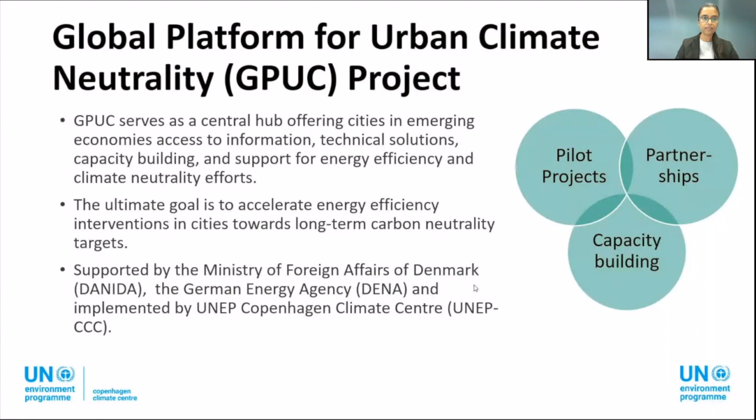Over the past 2 days, we've covered a lot of ground on the critical role of energy efficiency and how it plays in the building sector. On day 1, we looked at why energy efficiency matters, especially when it comes to reaching our climate goals. We heard from government representatives from Mauritius and Zambia who shared in-depth perspective on the unique challenges their countries are facing and the ambitious targets that they've set and what support is still needed to get there.

We also touched upon a variety of strategies, both active and passive measures, and got an introduction of the EDGE tool, which is helping unlock green finance for buildings across Africa and beyond. IFC's implementation projects gave us some real-world context to the tool, and the panel discussion highlighted the challenges surrounding the financial gaps and limited awareness, which were echoed by both Zambia and Mauritius.

Then yesterday, we focused on policy and regulatory frameworks, what they look like, how they're applied, and how they can work in different contexts. We explored tools like regulation, incentives, and information instruments, and learned from the experiences of Zambia, Mauritius, and Ghana. We talked about how nature-based solutions and energy efficiency can go hand in hand to deliver sustainable, long-term outcomes and the opportunities for multi-stakeholder collaboration in the building sector. The conversations have been rich, the questions insightful, and your engagement truly inspiring.

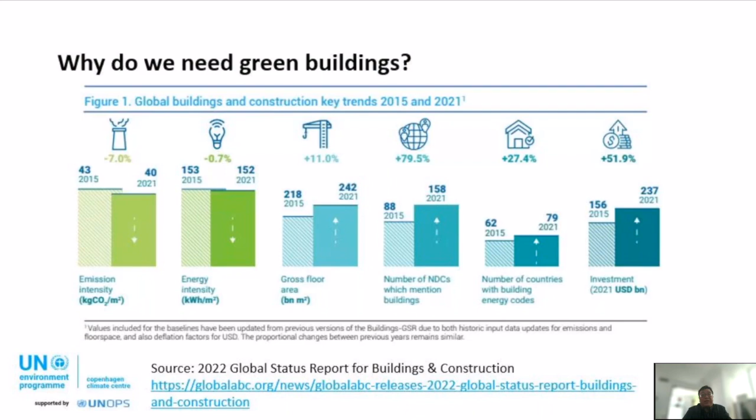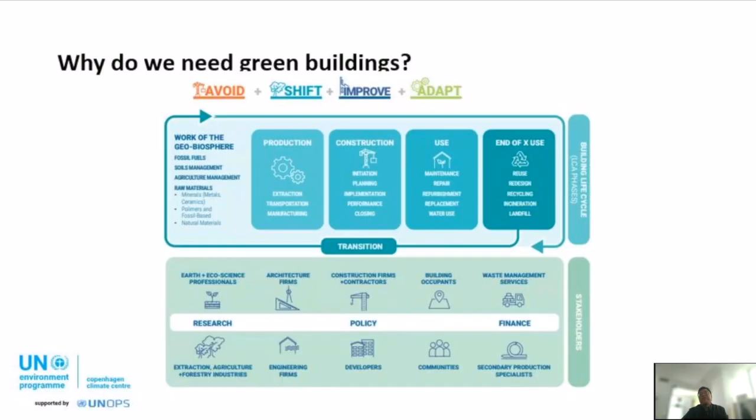So as a result, the report suggests several steps that we need to improve CO2 emissions in the building sector in order to transition to a future of zero carbon buildings. It requires the design of multi-beneficial material strategies that take a whole building life cycle and a systematic thinking approach. That is very much in line with today's topic in my presentation about integrated building performance design. It requires systematic thinking, covering not only the standalone building itself, but also the community and the city scale. And not only the architecture design itself, but also the mechanical design, the water efficiency, and the energy efficiency.

As you may already know, there are a lot of benefits from green building implementation, and a lot of co-benefits as well. As you can see in the middle, that is research from the US Green Building Council, mainly in the USA, saying that by implementing LEED certified buildings and operating them in a LEED certified way, you can save around 30% energy on average, and more importantly, 35% of carbon, 30 to 50% of water, and generate 50% or even 90% less waste. So this gives you some of the benefits and co-benefits that green building can bring.

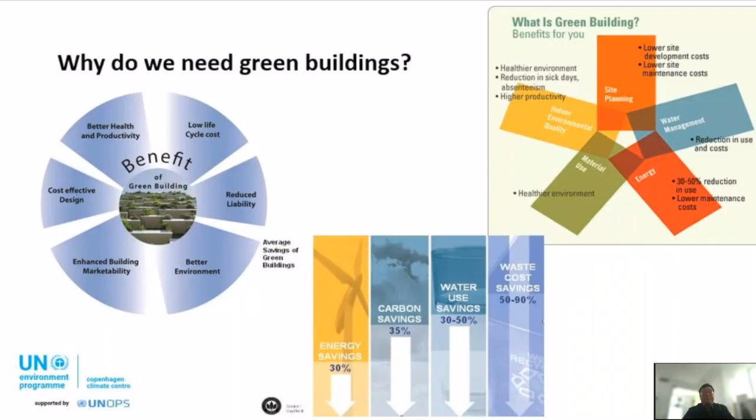And then let's talk about energy efficiency and how it links with green building. As you know, energy efficiency and water efficiency are key parts of green building certification. Like I mentioned, improving energy efficiency in buildings can bring benefits not only at the building scale, but also at the district scale, meaning that if all the buildings in a community are designed based on green building, they can have regional benefits.

And then also, even at the city level, it can bring additional benefits at the city scale. It can be more environmentally friendly, conserve natural resources like water and energy, generate less waste and pollution, and more importantly, save costs through using less water and energy. And more importantly, it can improve the indoor environment, making it safer and more comfortable, so that it can improve the health conditions for the occupants.

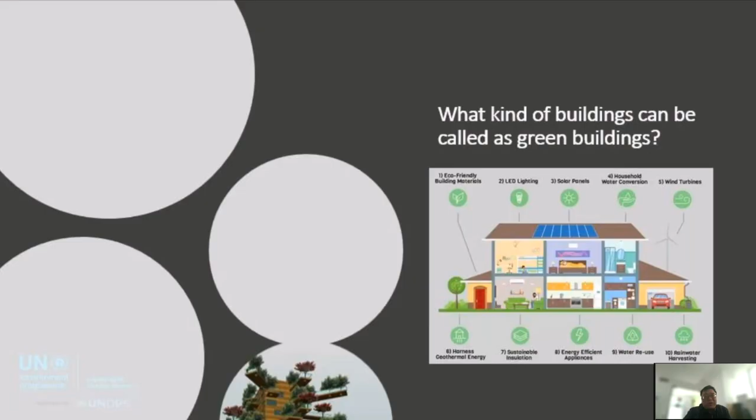So then we come back to the basic question: what kind of buildings can be called green buildings? Actually, this is not a simple question to answer. Through the past 20 or 30 years or even longer, there's been a lot of discussion on what kind of buildings should be called that. In the past, the original one was to make the building green. This is the original concept of the green building. Here you can see they made the building all green and called it a green building, I think around 50 years ago.

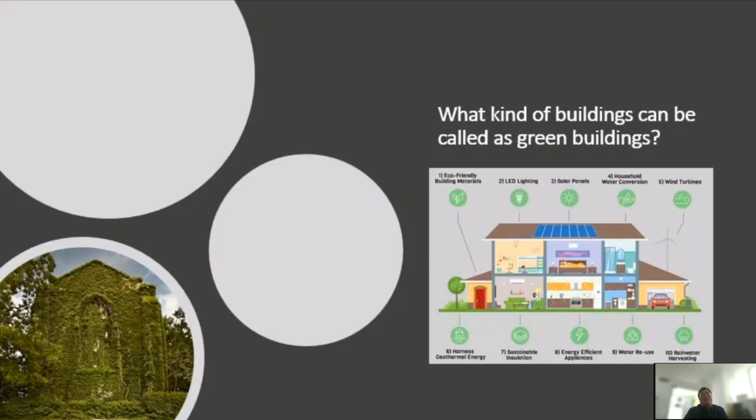And then later, they said no, painting the building green is not sufficient. They said that every occupant in the building, when they look outside, should see green. So they planted trees on different levels and at every window of the building, so when you look out, it's all green.

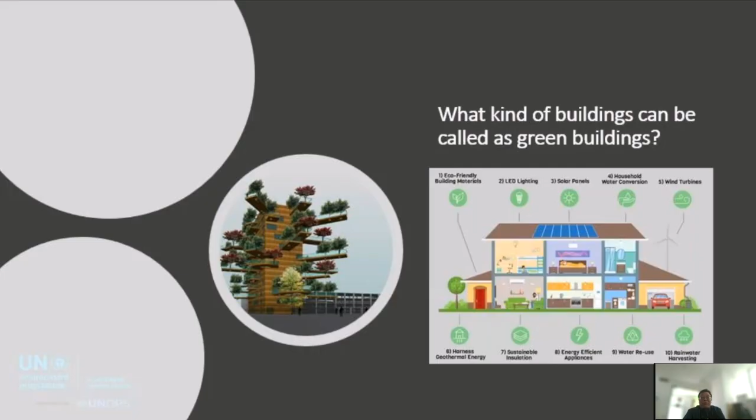But more importantly, in the last 20 to 30 years, there's a concept that a green building is not a building only, it's a system, with water, energy, waste management, air pollution or IAQ, et cetera. For example, in this picture, they can have PV panels, high energy efficient appliances, and high water efficiency in the bathroom, et cetera.

So as time goes by, more and more components and contents are put into the concept of green building, for example smart control, AI, et cetera. It makes the building not only much greener, but also more environmentally friendly, with lower carbon consumption not only in the design stage but in the operation and maintenance stage, and a higher quality indoor environment. So the concept of green buildings is evolving over time, and more and more contents are put into this concept.

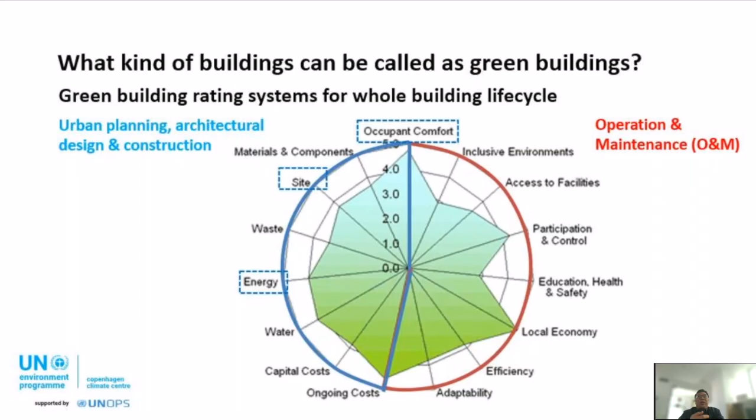So nowadays the green building is not only a building itself; it's becoming a complicated system covering different components. When we look at a green building as an example, we can see they normally have different types of efficient systems that make the building green, let's put it that way.

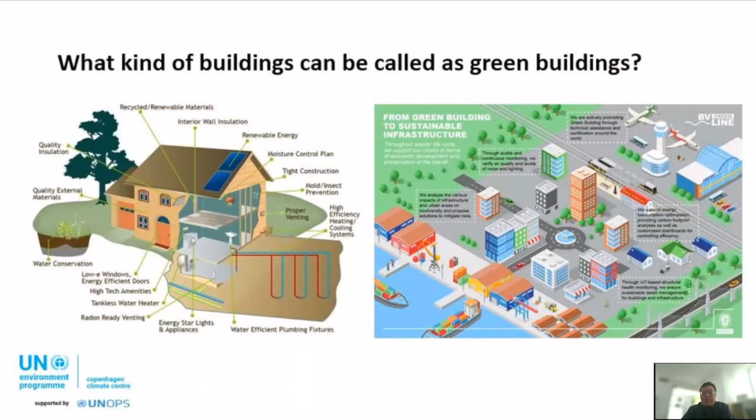And also, as you can see, there's a lot of green building rating or certification systems in the world. Of course some of the developed countries like the USA and the UK have had the LEED and BREEAM systems for many years, like in Germany also the DGNB system, and also some of the developing countries have their own green building certification system. For example, China, South Africa, etc.

And also, normally all the green building rating systems have different certification levels. For example, LEED has Certified, Silver, Gold, and Platinum. So they have different levels, and the higher level you are achieving, that means you can have a higher level of energy efficiency, water efficiency, indoor air quality, etc.

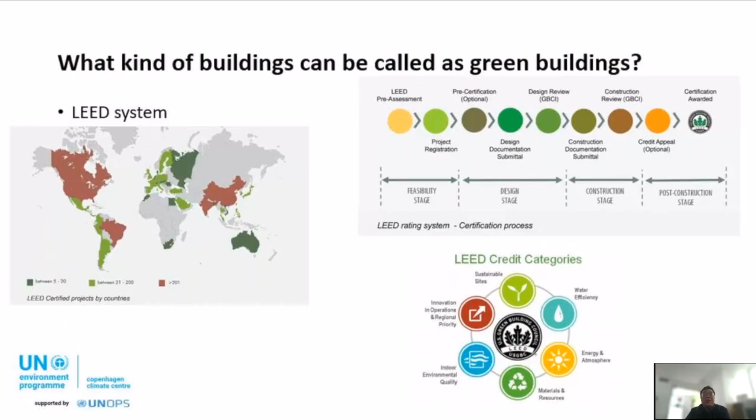And then also there are some statistics to summarize where the LEED system is. For example, the LEED system has different categories that fit different types of buildings. For example, they have neighborhood development, new buildings, campus buildings, data centers, etc. So they have different categories which can fit different buildings. And also they have different chapters where you can get points with different focus. For example, they have sites, water, energy, materials, etc. So it's all summarized here. Considering the time, I don't want to go deep into it.

And also, like I mentioned, the LEED system has homes, neighborhood developments, operations, and new BD+C, the new development. And they have different levels with different points. So this is the basic LEED system. And some of the other green building rating systems are very similar. You get the points, and once you calculate all the points you can see which certification level you are. These points are based on different categories, etc.

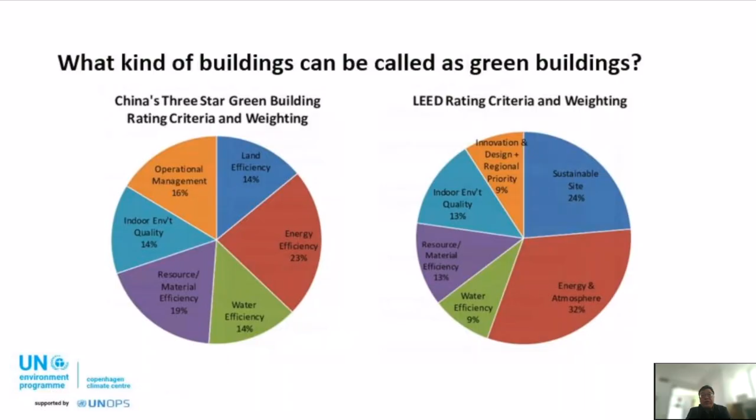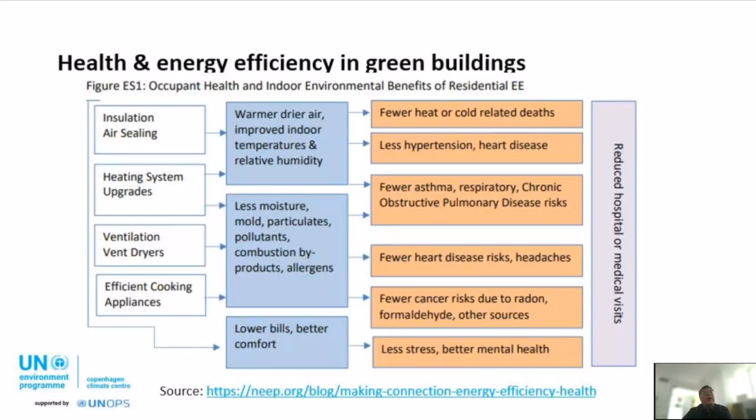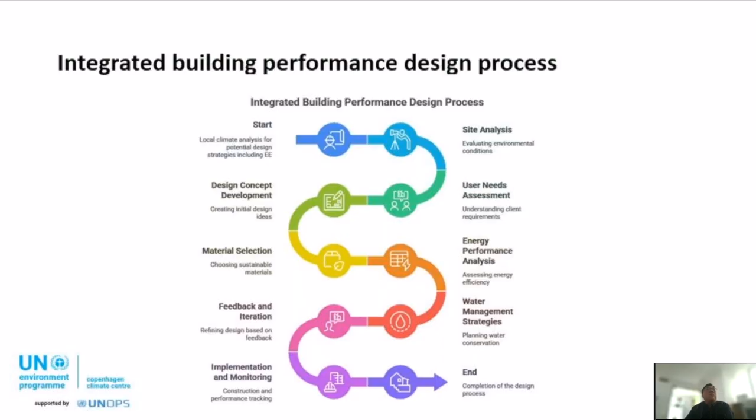Also the cost analysis, and more importantly, green building normally requires feedback from the building management team, on how to better operate and manage the building once it is implemented, and then we have this design. But by saying that, how to start?

And then here actually is an example that I worked on together with Foster and Partners when I was in the USA. Actually, it is designed for sun. So this is an apartment for old people, and the architect required that they need to have at least 8 hours of sunshine every day. 6 hours. 6 hours every day, and then we helped the architects by doing this sunshine simulation to cut down the different shapes of the building.

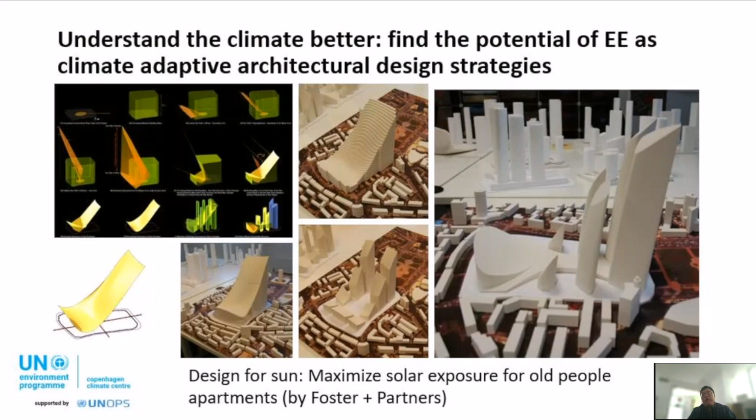So then we reached the final design plan on the right side. And with this special shape, the sunshine can come in not only in the morning but also in the afternoon. So then back to the topic.

Okay, we need to understand the climate better, so as to find the potential energy saving for climate adaptive purposes. So in Zambia and Mauritius, we did the analysis, and we've outlined six potential ECMs, energy conservation measures, that you can use.

And as you can see from the left picture, the more on the left is more artificial, meaning that you need to have electricity, you need to have man-made material installed in the building, and whenever you go to the right side, it's closer to the natural or passive. So, for example, by planting trees, by using reflective materials like cool roofs, it can help you to naturally or passively reduce the energy consumption.

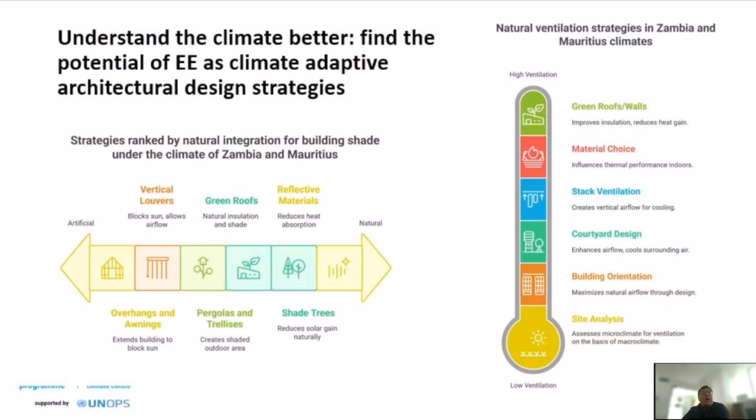So you can see here, and also on the right side of the figure, in terms of natural ventilation, we analyzed the climate of Zambia and Mauritius, and outlined that they need to follow the following categories to improve from low ventilation to high ventilation possibilities.

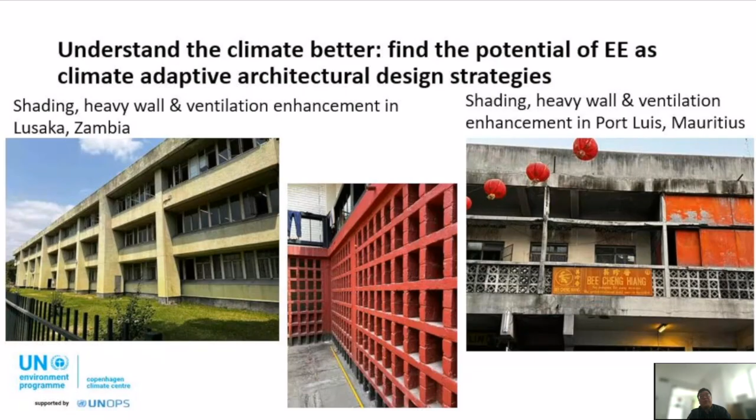But then we need to think about more components. So we think about what exactly we should do in integrating building performance design. And like I mentioned before, it is not only the standalone building itself, but also the community level. So this is the picture that we took on a hot summer day, I think in the middle of June, in the hot and humid climate.

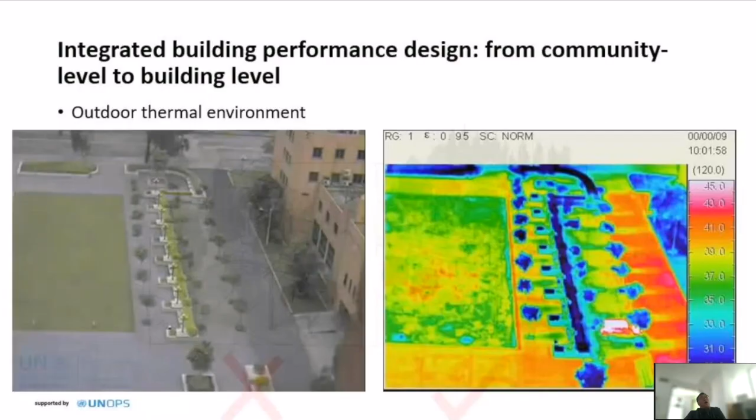And you can see that if you use cement in the pavement, the heat in the summer is very high, the temperature. But compared to the grass ground nearby, the difference in temperature can be as high as 10 degrees C. So we come to the conclusion that we need to plant trees, but how should we plant the trees? We need to consider the outdoor thermal environment.

So here is also an example. If the wind direction in the summer is from south to north, as you can see here, it doesn't make sense to have all the high trees planted in front of the building, because they will block all the natural ventilation, so the building cannot benefit from the cool air.

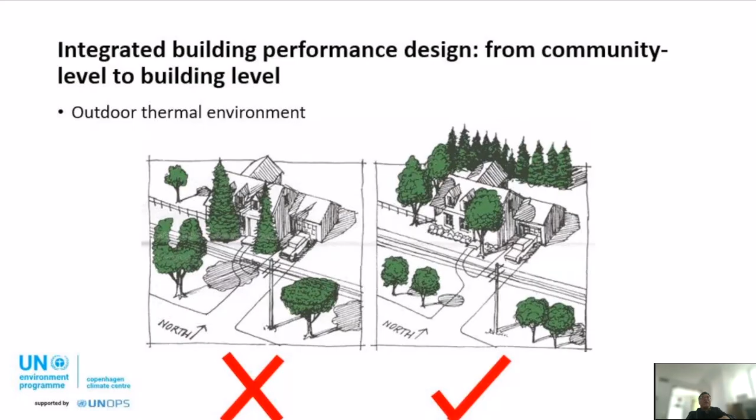So the normal way is to plant the high trees behind the buildings, so the cool wind can come from outside, go through the building, and reduce the air temperature. So here is also what is the impact of the vegetation rate on the cooling electricity.

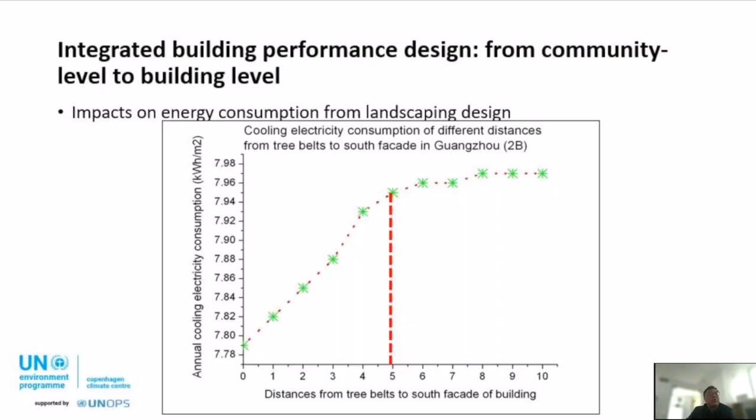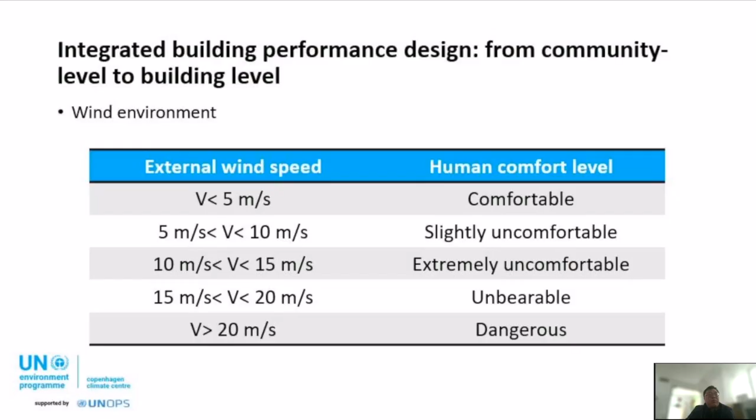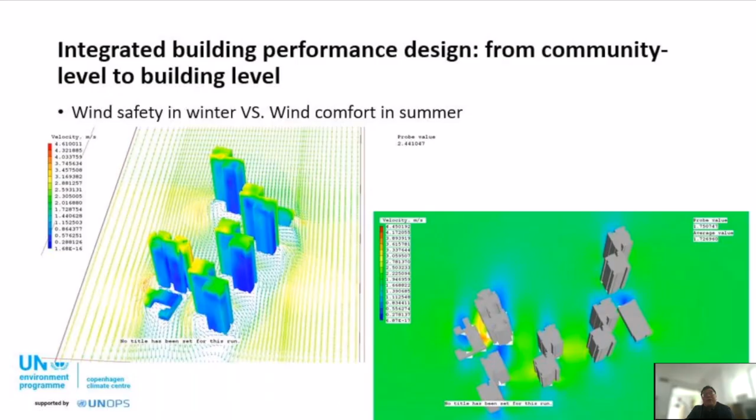And then also, what is the distance from the building to the tree, and what is the best distance? So we did this simulation also. And then also the wind environment: like I mentioned, we need to consider not only the summer but also the winter, and it will cover the comfort level through to the dangerous or safety level. So here is some of the simulation we did for wind safety in winter, and also considering wind comfort in summer. So this is the community level.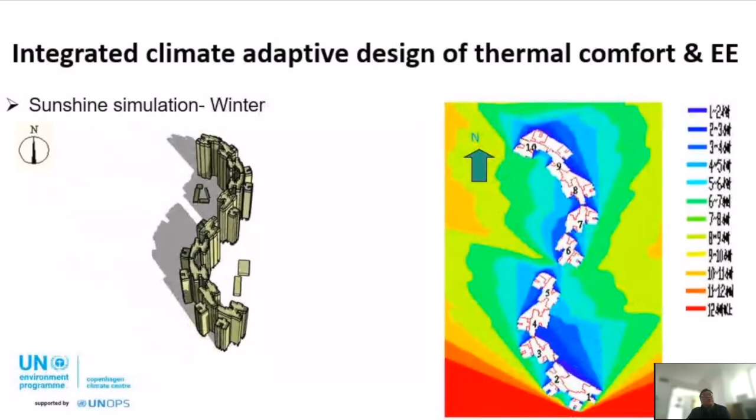So basically we do the sunshine simulation for summer and make sure that we block the sun by using different shapes of the building. The reason we have this S shape is that we use the building shadows to cover each other. And we also need to make sure that in winter sufficient sunshine can get into the building. This is the final result, but we did quite a lot of simulation during the architecture design. We also need to think about, in winter, where each room should be located, so that each room has sufficient sunshine hours.

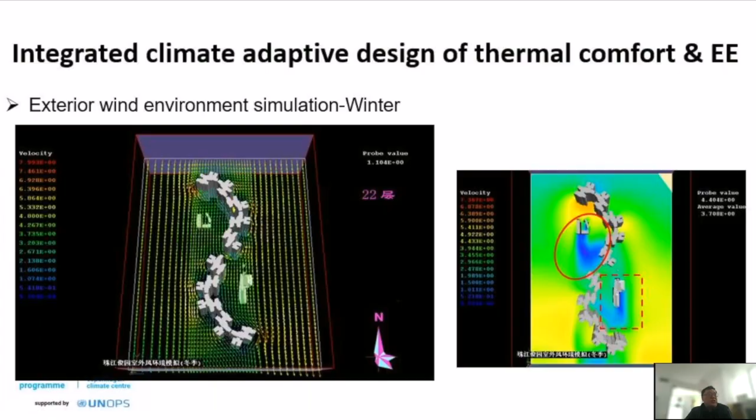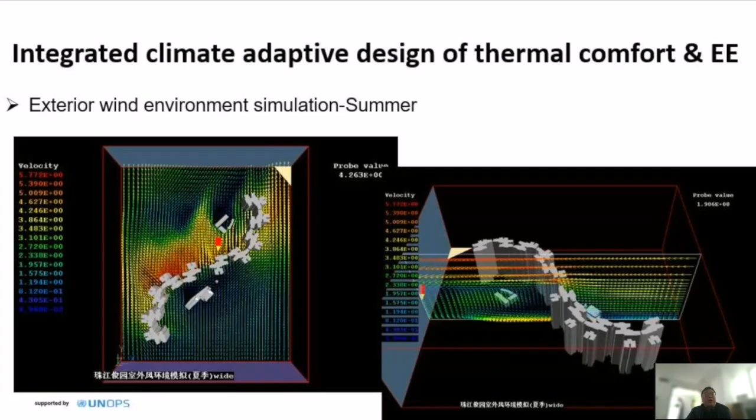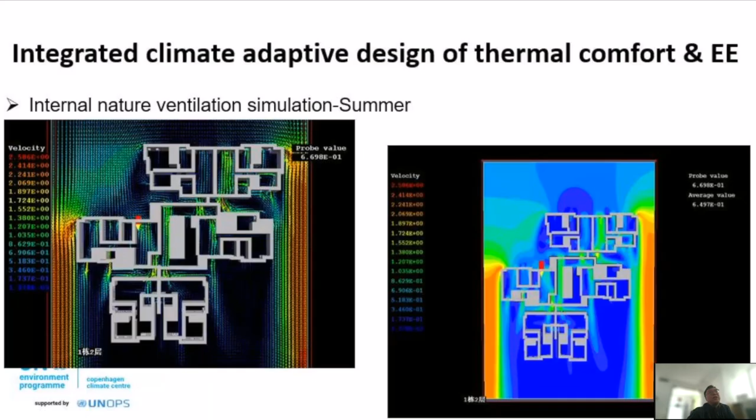And then we also do the wind environment simulation in winter. As you can see from the contour, we check whether in winter the wind speed is too high considering safety, and then we need to improve the architecture design if it's too dangerous. And in summer, we do this simulation to see whether the wind speed is too low for natural ventilation to be possible. By doing this, we facilitate the building design and floor plan design to make sure that we have sufficient operable windows, so the wind can go from outside to inside to reduce the indoor air temperature and reduce the cooling electricity consumption for air conditioning. So here is some of the result.

And yes, so with that, I think that I finish my presentation here, and I hand over back to Trupti.

Thank you, Zhuolun, for diving deep into the concepts of green buildings and for mentioning all the design strategies that architects need to keep in mind in the design phase. And now it's time to learn from Lenore about the EDGE tool as well as the BRI tool developed by the IFC EDGE team. So over to you, Lenore. You have the floor. Thanks, Trupti.

Thanks, Zhuolun, for that great coverage of what green building design is all about and the different factors that are important to take into account. I think that gives a great link to what I'll be covering today, which is around the EDGE green building certification, as well as the Building Resilience Index tools.

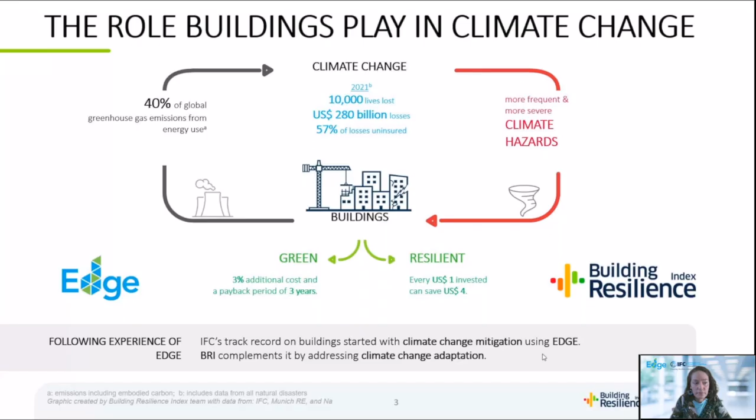So why was EDGE created? So there are many different green building standards, as you've heard. The reason EDGE was created was to mainstream green buildings and to tackle climate change. What we saw in the market was that there were many green building standards that were focusing more on the high end, and they involved a higher cost as well as many different components that you needed to achieve in order to meet the standard.

So most of them were focused on that top tier, that top triangle there, which was custom buildings, and they provided leadership. They showed that they were leading the change in terms of green buildings, but it was difficult to implement those standards on, for example, affordable housing or social housing, and that's where EDGE came in to be able to address that particular gap in the market. So EDGE was created to mainstream resource-efficient buildings in emerging markets.

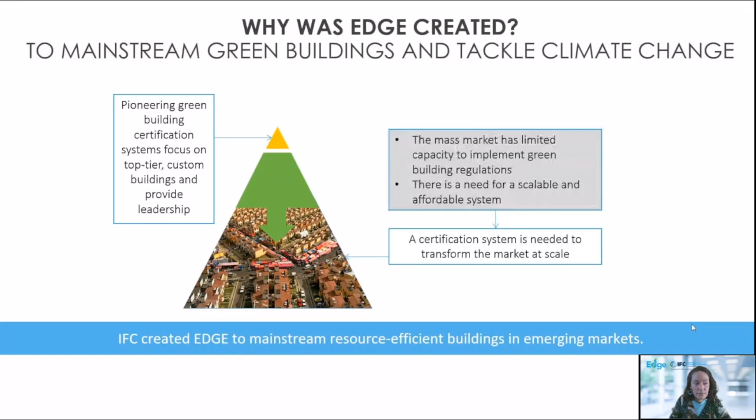So why EDGE? It's got international acclaim. It also helps clients to be able to link to green finance. Often, if we want to be able to have green investments, there are many investors who want to invest in green buildings. You have to be able to demonstrate that the building is actually green. So I will go through some of the ways that EDGE aligns with various international standards so that it can be acceptable for the use of proceeds in different ways and for green finance.

It's also got a cost calculator. So EDGE helps you decide the best green options and to estimate incremental costs for going green. In some cases, that can be even less than 2%. There's often a perception that green buildings are very expensive. Some people perceive it to be 20% or 30% more expensive than a normal building, but in fact, that cost can be reduced, and we've even seen it down to less than 1% for some clients when they've gone through the different green building measures, they've optimized it, and they've been able to bring that cost right down.

EDGE focuses on resource efficiency, energy, water, and embodied energy in the materials. It also uses bioclimatic modeling. So even though it's a global standard, it does take into account the local climatic conditions of the country where your project is. We've done our best to streamline the process so that we have a shorter workflow for certification that saves time, and also to have efficiency in terms of the required documentation. And it helps clients to decarbonize their portfolio.

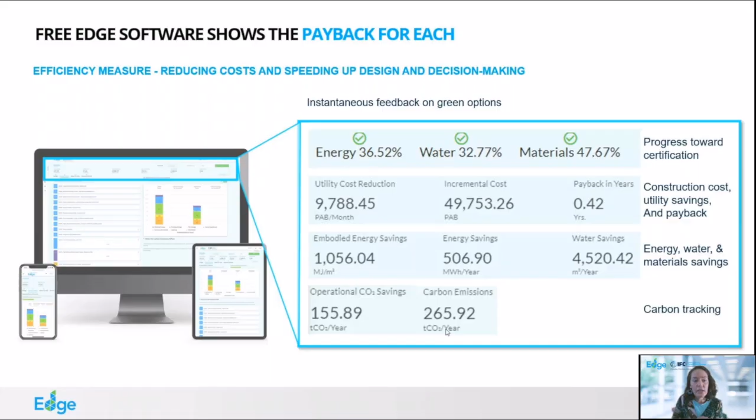And if you click over to the right, you'll also see what that incremental cost is of that particular measure, as well as the utility savings. So in that way, it really helps designers to make informed decisions about which measures they will take to improve the building to reach the EDGE standard, to improve the building performance. But it also shows you what the cost associated is with each of those decisions.

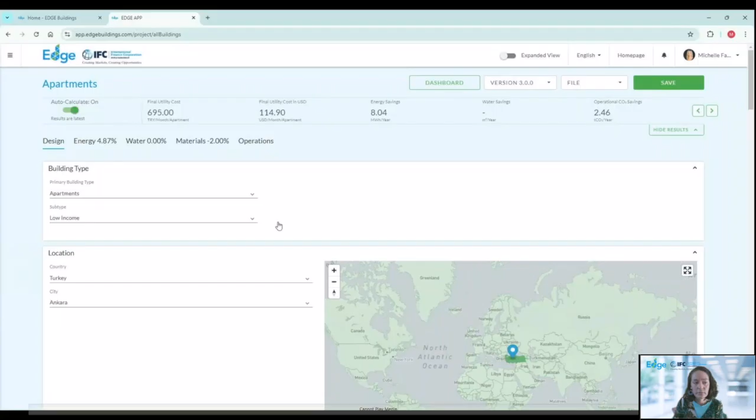There's growing evidence that EDGE certification also can increase profitability of projects. We've seen that, for example, in housing projects, if the project is shown to be green certified, sometimes there is a higher uptake of the tenants coming to rent those particular green apartments. We've also seen in sales where EDGE certified apartments sold faster than non-EDGE ones for the same client.

We've also had examples of where clients have been able to demonstrate that if you rent a certified building, or a building that is more resource efficient, then they could save renters up to 1 month's rental in a 12-month period, and that they would then use that for their marketing. And so having a green building is not just better for the environment, but it can also improve the business case and can increase profitability.

So these are some of the other ways, like, for example, quicker sales. They could also differentiate their product in the market. There's also an opportunity to have a green portfolio. And we've also had clients where they built a number of green assets together, and then they could have a green bond and go out into the market and get investments for that particular portfolio.

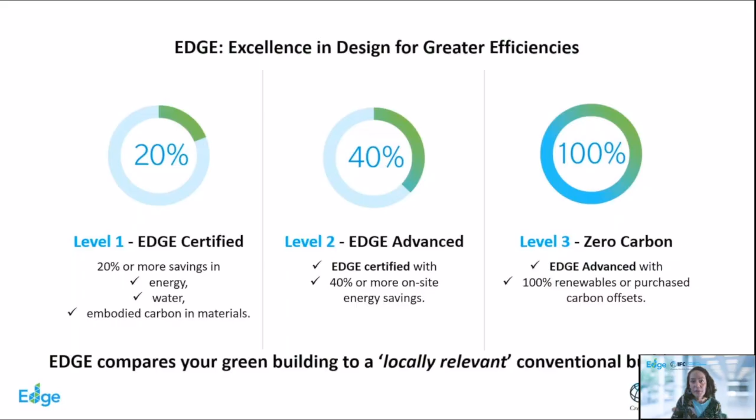So in all of these cases, EDGE compares your green building to the locally relevant conventional building. Excuse me. So whichever country you're operating in, as I mentioned, that will be the local building code. So there are various advantages of EDGE for home builders, commercial owners, and those who are building to sell.

And there are 3 steps within the certification process. The first step is to register the project within the EDGE app. The second step is, once the project has been registered, they need to upload the documentation. And then that will go through the certification process. It also needs to be validated, and there is an auditing process. And I'll show a little bit more detail on this.

So once the project is registered, there's a design audit, where the EDGE auditor will go through the documentation and check that it does actually meet the standard. And at that stage, they receive a preliminary certificate. So basically, that's a design certification. Then once construction happens, an EDGE auditor would go out on site to check that what has been constructed still meets the standard. And then at that stage, you'll get a final certification. If you're going for zero carbon, then there needs to be 1 year of operational data in order to demonstrate that whatever energy is needed for the building is actually being produced on site or being offset through carbon offsets.

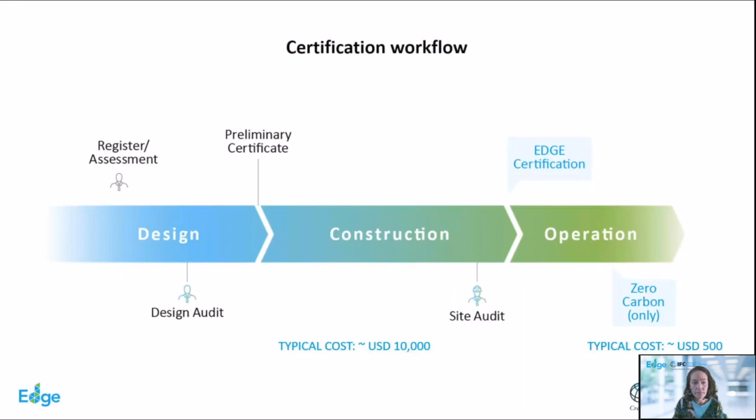So there are various roles on the EDGE project. You have an EDGE expert and an EDGE auditor, as I mentioned. When the project is registered, then the client can develop a certification strategy. The documentation is collected in the design stage and then uploaded.

Everything happens in the EDGE app, which is web-based, and all of the data is then stored in the cloud, all of the documentation. During construction, the documentation is collected, and then the site audit is conducted. And then for the zero carbon, the operational data is also collected.

So the EDGE expert basically helps the client through the certification process and ensures that all the documentation gets uploaded appropriately. The EDGE auditor will then review the documents at design stage and then at final certification stage, and then will submit that to the certifier. The certifier will review what has been submitted, and then they will either grant the certificate, or if certain documentation is missing, then will ask the EDGE expert to fill those gaps.

So it's possible to become an EDGE expert by doing a one-day training and then going ahead to do an exam, and then one would get an accreditation to be able to take clients through the EDGE certification process. On our website, we've got lists of hundreds or thousands of EDGE experts around the world. An EDGE expert can operate in any country, but EDGE auditors are specific to the different certifiers.

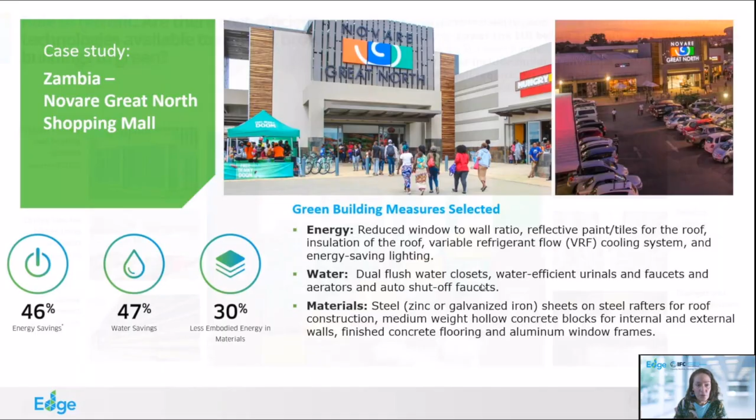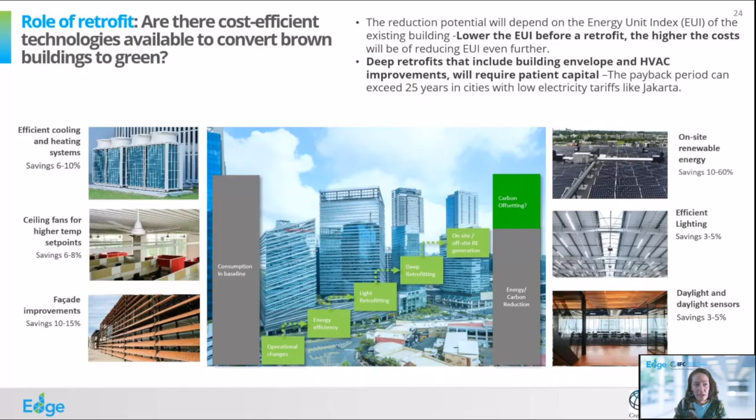So IFC's definition of a resilient building is a building that can withstand the hazards it's exposed to today and tomorrow due to climate change, and ideally continue its operations without disruption following an intense hazard event. So there are three different aspects. It's identifying the risk, managing the risk, and disclosing the risk.

BRI is online and globally available to users free of charge. And as of November last year, we had 168 projects, resulting in 9.3 million square meters of assessed total floor space and $5.6 billion in total asset value. And BRI is growing.

So what is Building Resilience Index, BRI? It's a verified self-assessment online application that rates any building's hazard mitigation measures. And in identifying risk, a location-specific and asset-focused approach is used. We've used historic data on natural hazards and future-looking climate change projections. And these are some of the aspects that we've taken into account: wind, water, fire, and geoseismic hazards.

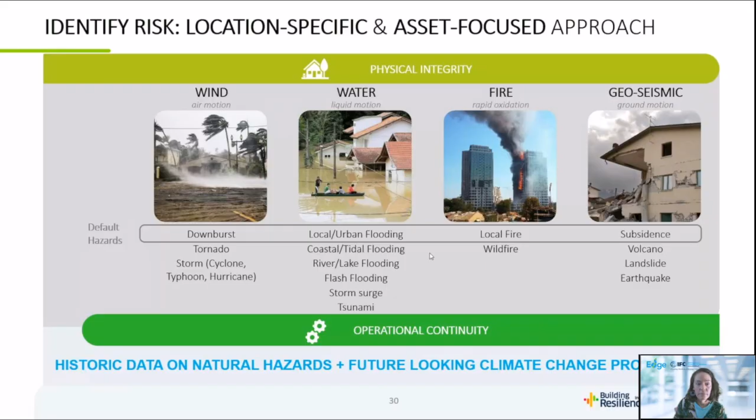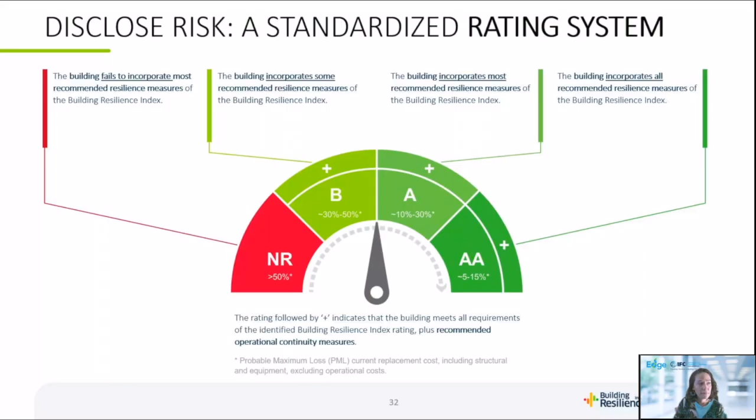And there's a weakest link principle. It uses the applicable local hazards that must be addressed in order to achieve the overall resilience. And the building resilience rating cannot be higher than the weakest link, which is any relevant hazards. So depending on which hazards are being taken into account, whether it's wind, water, fire, or geo, if they're all yes, then you would get a B. But if you have one non-resilient, then you would get a non-resilient for the building.

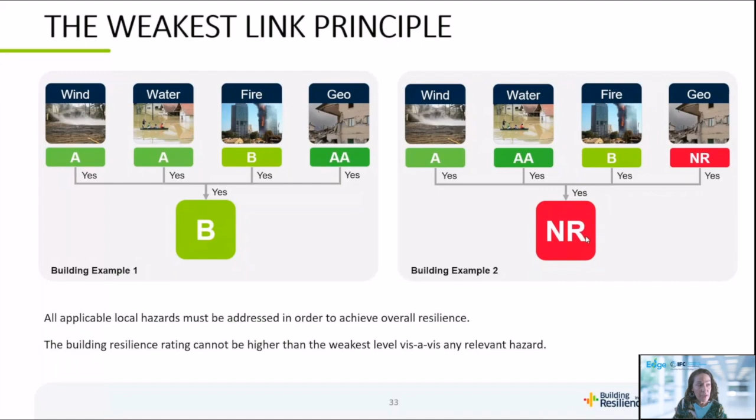We're just in the process of training verifiers, and we're having the first verifiers getting certified. So in this process, we've just trained a number from Mozambique as well as from South Africa, and we're still coming to Mauritius and Zambia. So for now, we don't have local verifiers, but we're in the process of training them up so that once the client has done a self-assessment, they would be able to then verify the rating that has been achieved.

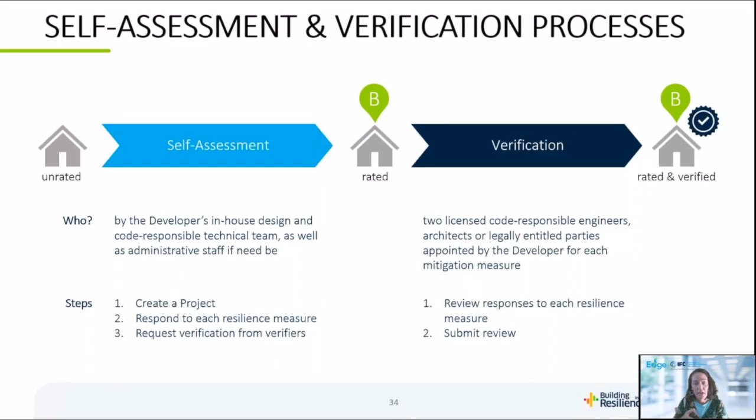And so we have one case study in Mozambique, and this was the first in Sub-Saharan Africa to implement BRI. We've had early adopters that are under self-assessment for reconstruction and rehabilitation of health units. We had community health, UNDP. We've also had resilient project Gorongosa National Park and UNICEF Maputo office building that achieved EDGE Advanced.

So we had the first verifier training in 2024, and there were 5 verifiers that have been certified in Mozambique, and we launched the first green resilient building professional network in Mozambique called the Bridge Cafe. So far we don't have any BRI buildings that have been certified in Mozambique or Zambia. As I said, we're still in the early stages, and that's all from me.

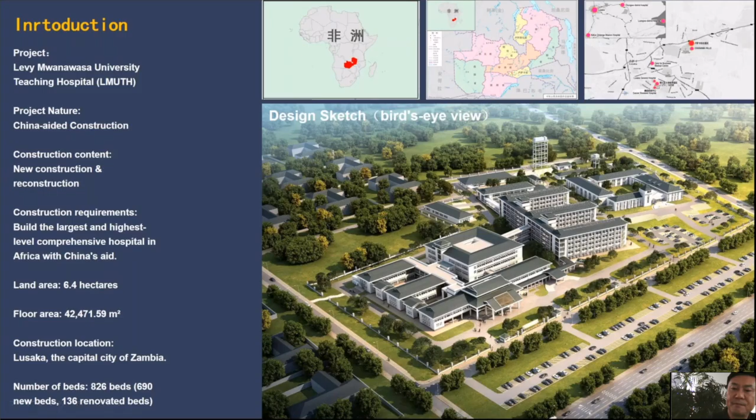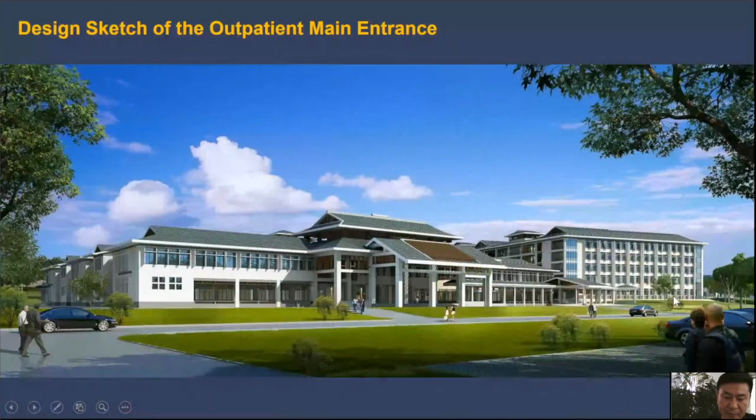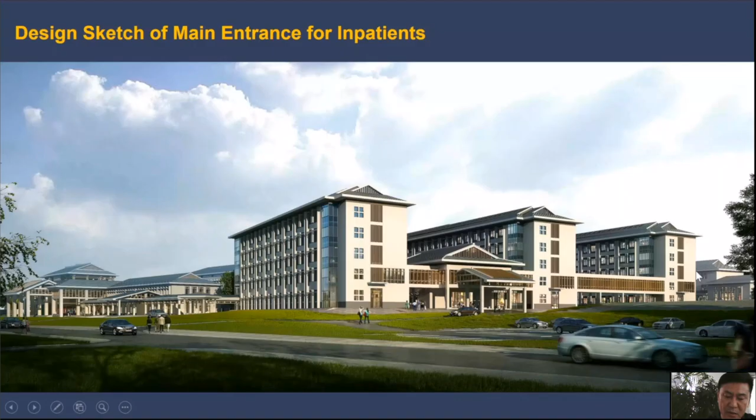Plenty of preliminary research was done before the design process. Since there was no second-class general hospital in Lusaka province at that time, a high-level hospital to fill the gap of the medical system for the capital city was in great request. So the aims of building the project were: first, enhance the level of medical services by building the new facilities. Secondly, build a second-class hospital in Lusaka province to supply the lack of the local healthcare system.

Thirdly, construct a high-level modern general hospital achieving the standard of Class 3, Grade A, according to the Chinese classification of hospitals. Fourthly, this new facility should be built as an advanced, distinctive, harmonious, economical, sustainable, and resilient building.

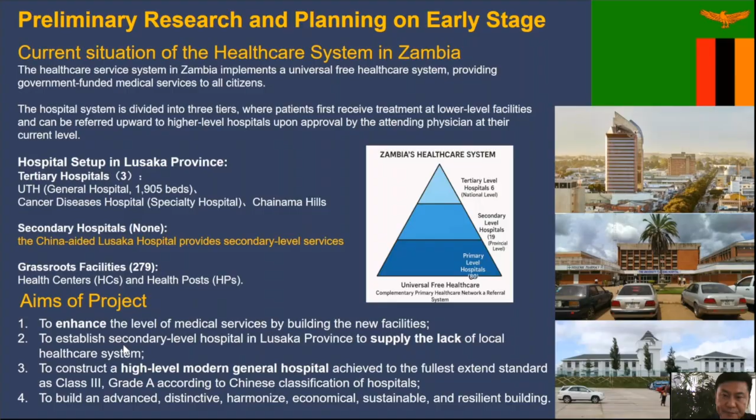In the feasibility study phase, we worked in Lusaka with the governors, the clients, the medical staff, and the engineers for months to discuss various aspects of the project. In the design phase, the influential factors taken into consideration included geographic and climatic conditions, local economic development level, functional mechanism of the healthcare system, lifestyle and cultural habits, and the potential of future development.

For green hospital design, reference construction codes included LEED for Healthcare, the American standard, and the Green Hospital Building Evaluation Standard, the Chinese standard. Relevant key considerations were sustainable sites, water efficiency, energy and atmosphere, materials and resources, indoor environmental quality, operational excellence and maintenance, durability, etc.

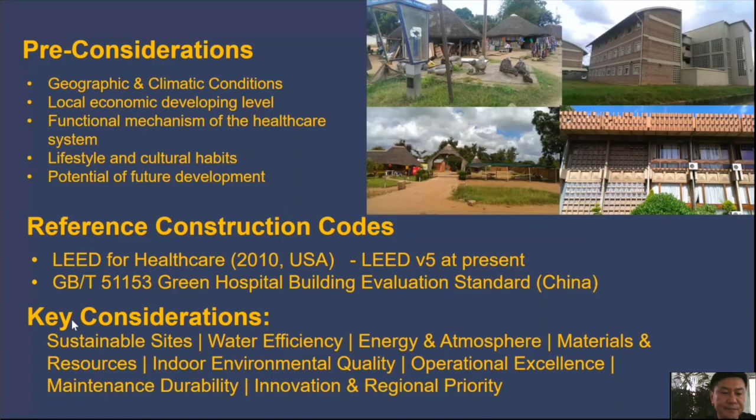Research has shown that the energy consumption level of hospitals exceeds twice that of average public buildings, and the heating, ventilation, air conditioning system and the lighting system account for the largest proportions of the total energy consumption of a hospital. Therefore, the sustainable development of hospitals should lay more emphasis on the control of HVAC system energy consumption, lighting energy use, and the medical equipment's energy demand, as well as the efficiency of medical function.

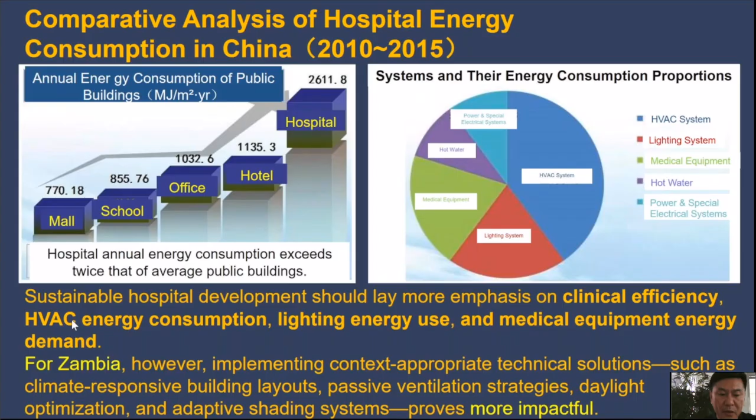For Zambia, a least developed country, climate-responsive building layouts, passive ventilation strategies, daylight optimization, and adaptive shading systems, etc., are the most effective technical measures. On account of this, we proposed the main design concepts as follows. Fully integrate the medical function between old and new buildings. Keep the scope of the renovation project within 20% of the original. Plan a simple medical functional framework with high efficiency performance.

The maternal and child specialty unit and the integrated healthcare system achieve synergistic resource sharing. Design a separated infectious diseases unit with hygienic security. The architectural layout should encourage the integration of the inner space and the natural environment. The green strategies respond to the regional and cultural characteristics.

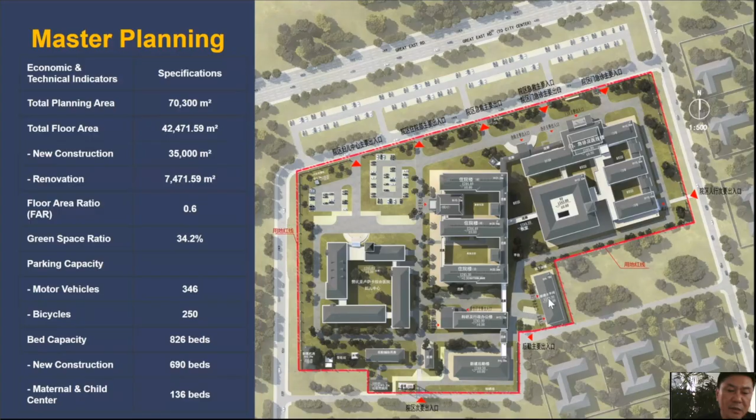Different types of personnel are assigned separate entrances and exits. The H-shaped main medical street provides the transportation routes between buildings and creates a high-efficiency functional framework. The routes for sanitation supply, food delivery, and waste transportation are all independent from each other. The picture on the right side shows the effective and hygienic performance between different medical departments.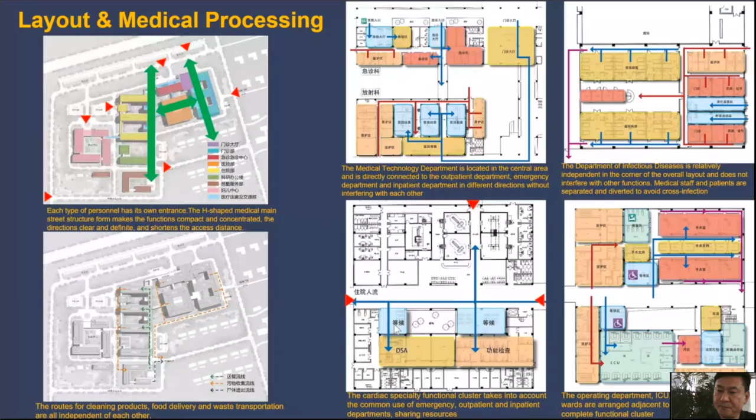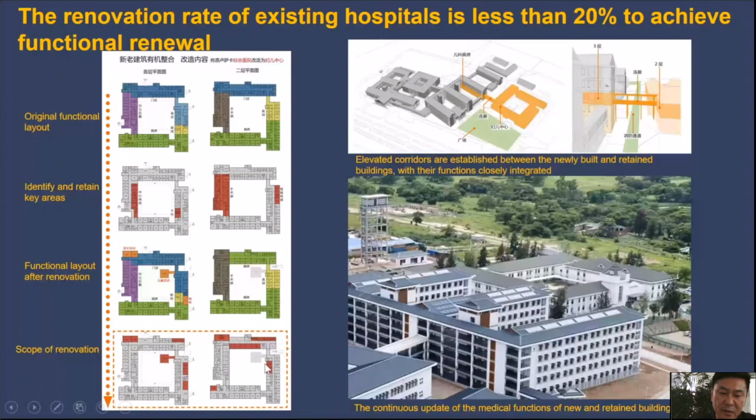Taking into account the renovation costs and the time saved in construction, keep the scope of the renovation project within the 20% of the original. Balancing the earthwork volume is a good use of site and reduces the cost. The H-shaped main medical street reserves the open connection of the new construction in the future.

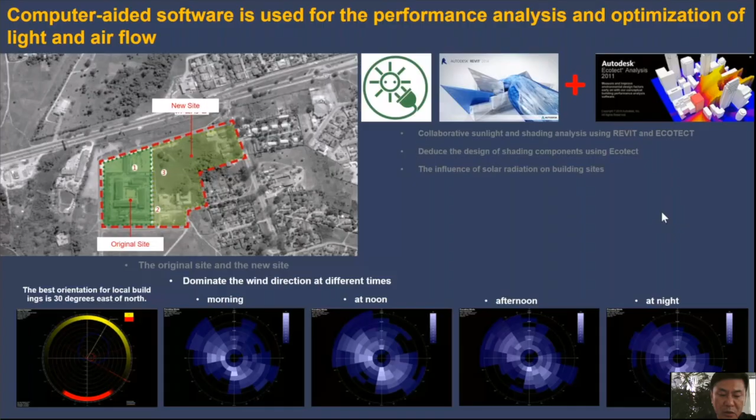Based on the geography and the climate condition, we used the computer simulation software to analyze and optimize the light and the airflow for the building's orientation and organization. According to the conclusion of the computer simulated models, the multi-story decentralized building layout not only provides the efficiency of medical function, but also sufficient sunlight spacing between buildings. The architectural shadows form effective shading, creating a relatively favorable microclimate environment for the natural courtyard spaces between buildings.

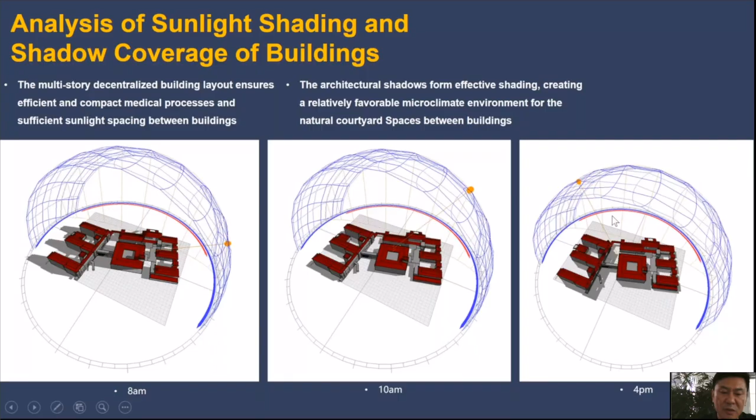The influence of strong sunlight in Lusaka was considered carefully. The intensity of solar radiation on the building site affects the comfort of outdoor spaces, especially areas with frequent human activities. Computational simulation shows that the solar radiation intensity in the entrance spaces of the outpatient and emergency department and inpatient department, as well as in each courtyard space, is relatively small. Combined with appropriate shading facilities, it meets the requirements of comfort.

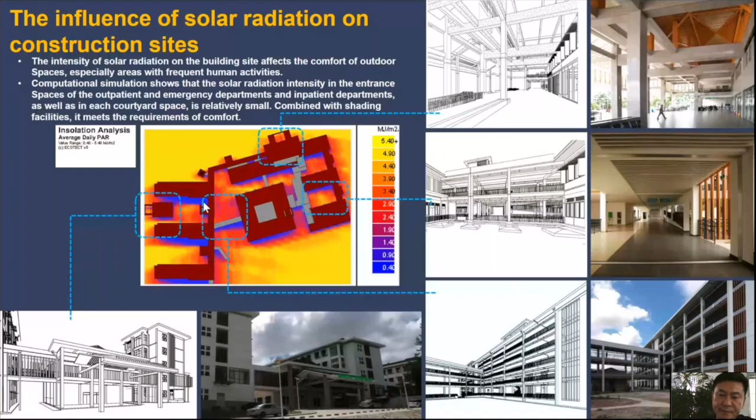All-round shading systems were installed on the buildings, which allow more sunlight to enter the rooms in the cold season, while preventing excessive sunlight in hot season. Additionally, vertical and horizontal shading components have the highest shading efficiency in the north-facing walls. Sufficient and well-balanced natural light is provided for the inpatient wards and the consulting rooms, which reduced the artificial light installation and lowers the energy consumption.

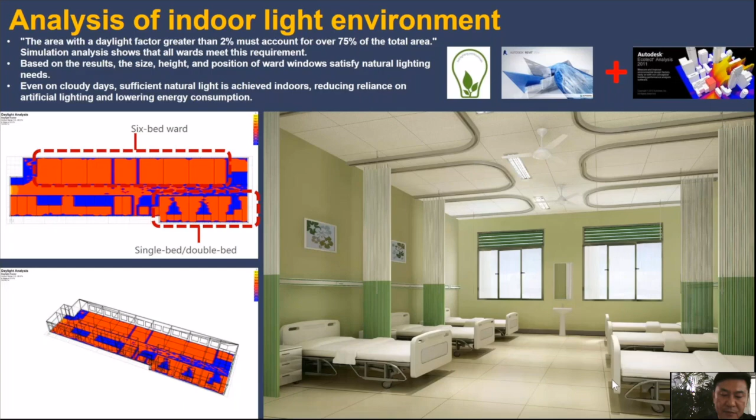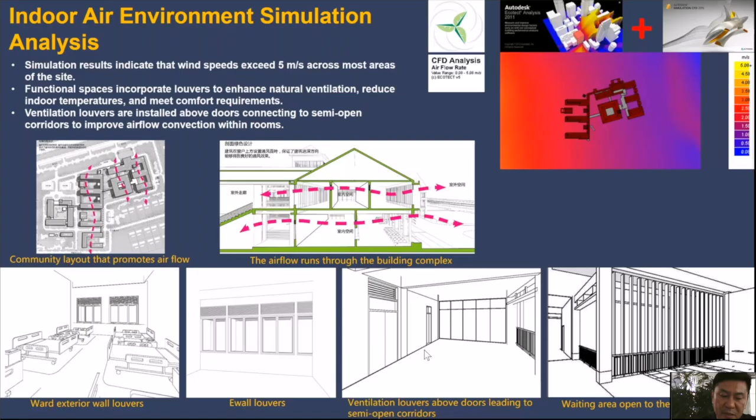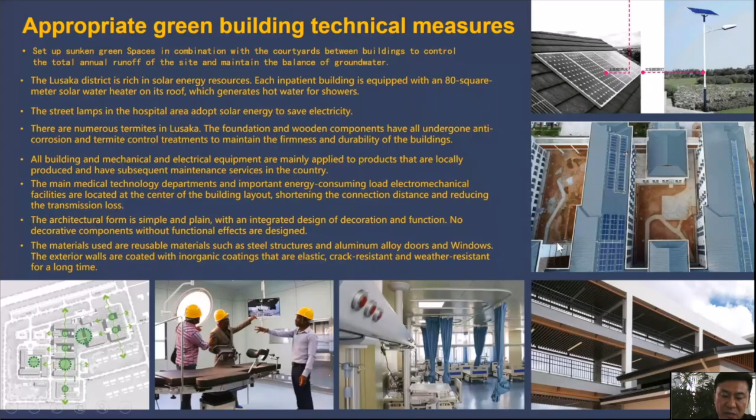The indoor air environment has been controlled to be fresh and comfortable by installing louvers in windows, doors, walls, and corridors to enhance natural ventilation and airflow convection. Many green technical measures were applied to reduce the energy consumption and save water, such as solar panels for hot water, natural courtyards collecting rainwater to maintain the balance of groundwater, etc. Sanitary ware such as wash basins are arranged in clusters to reduce the complexity of vertical piping installation, while the water drainage pipes are set along exterior walls for easier maintenance and replacement.

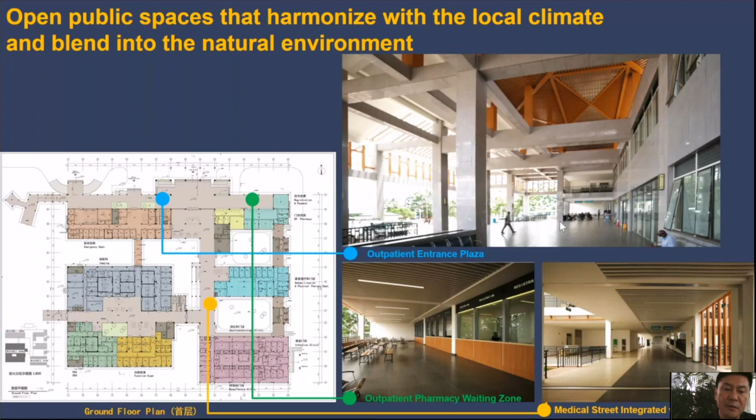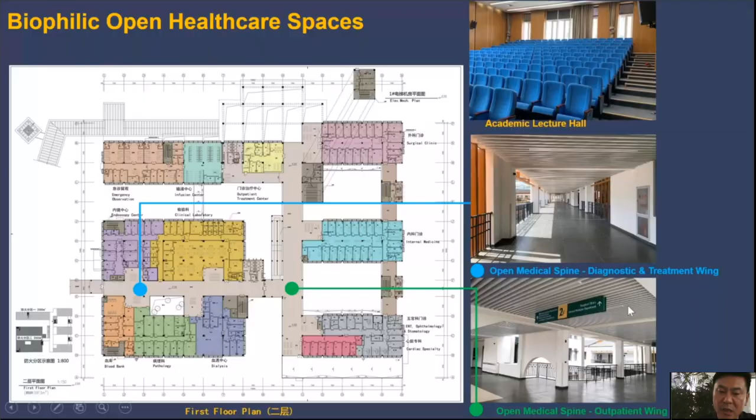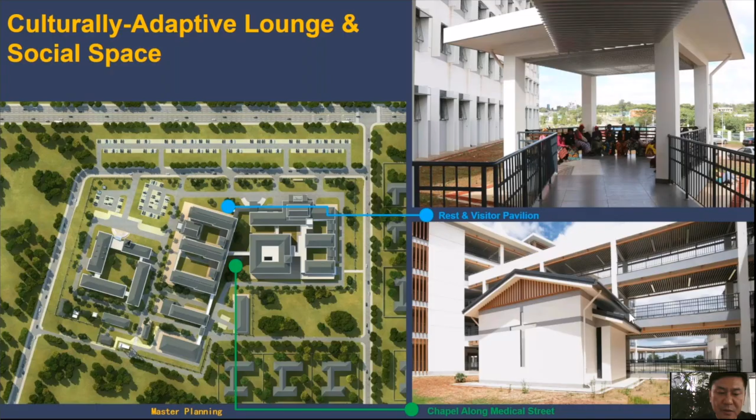All of the public spaces are open to the natural environment, promoting accessibility and orientation of the complicated medical functions. The rampway between the different floors encourages patients to walk voluntarily with attractive views of courtyard scenery. Local social customs and cultures are highly valued. Open pavilion and a small church were designed for patients' families, visitors, and medical staff. The architectural form of Levy Mwanawasa UTH extracts the aesthetics from vernacular architecture, also combined with classical Chinese architectural elements in a harmonious fusion.

Proudly, the Levy Mwanawasa UTH project won the Global Best Healthcare Project by ENR 2021, which is the most famous and authoritative magazine in the field of engineering and construction all over the world. The hospital is not only a successful project, it played a crucial role for saving people's lives and maintaining the medical system during the pandemic of COVID-19. The hospital was operated smoothly, effectively, and safely in the emergency period. For the great achievement, the hospital was upgraded to the Levy Mwanawasa University Teaching Hospital by the Zambia Ministry of Health.

Lots of leading technologies and sophisticated procedures could be delivered and practiced in this modern and fully equipped hospital, exerting its effect and contributing to the well-being of people in Lusaka, even throughout the country. Also, the China Aid medical team can work fluently in the environment, which is very friendly and similar to the high-level hospitals back in China.

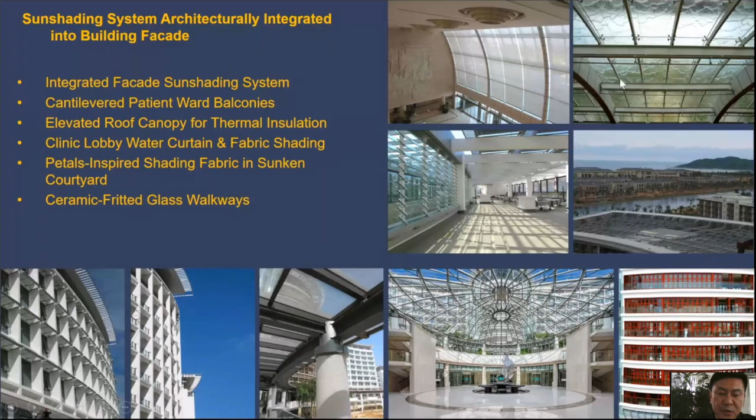Just 3 weeks ago, I visited the hospital again during an academic conference. It looks like a brand new hospital, brimming with life and cultural charm.

Here comes my conclusion. For green hospital design in different countries, the core value of the sustainable healthcare facility lies in its ability to economically and efficiently deliver high-quality medical services over the long term. In regions with varying development levels, fully utilizing natural conditions can play a crucial role in achieving sustainable development. For countries like Zambia, being in the process of modernization may, in a sense, provide greater advantages for sustainable development.

Resilient and enduring sustainable development goals rely on the synergistic application of diverse green technologies. Sharing best practice in sustainable hospital infrastructure development among nations can significantly advance global green healthcare initiatives.

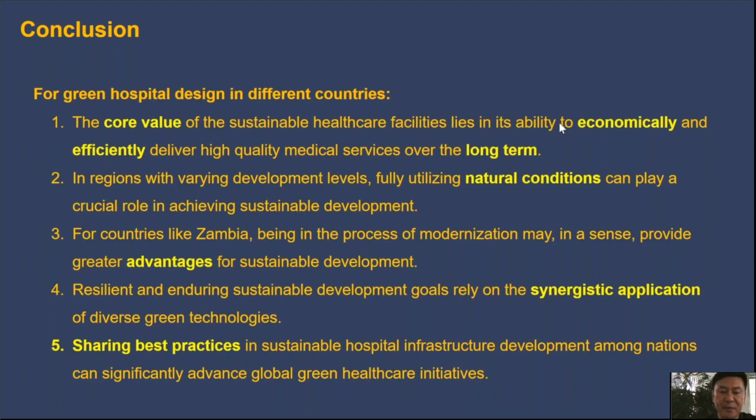Thank you for your time and attention today. Thank you, Li Hui, for that excellent presentation on the various design considerations for Levy Mwanawasa Hospital. And it's great to see all your efforts being recognized by the awards as well. So thank you for your presentation.

And now we have a few minutes left for some questions for our panelists. So I would request Lenore, you as well, to please join us by turning on your camera. We've been having some interesting questions from the participants today, and I would invite everybody to please use the Q&A icon to send us your questions for the panelists.

So to begin with, I have a general question. It says, how can lessons learned from these projects in Zambia and Mauritius be scaled or replicated in other cities of these countries, or even in other African countries facing similar climatic, economic, or infrastructural challenges? So would you like to go first, Zhuolun? Yes, thank you for the question.

As my understanding, when I visited Zambia and Mauritius and also other African countries, different countries have their own climate conditions and also their own challenges. But I think in general, it is very important to have a systematic thinking. Green building is not just one thing. And like I mentioned, some of the technologies used in green building can bring multi-benefits or co-benefits to other things.